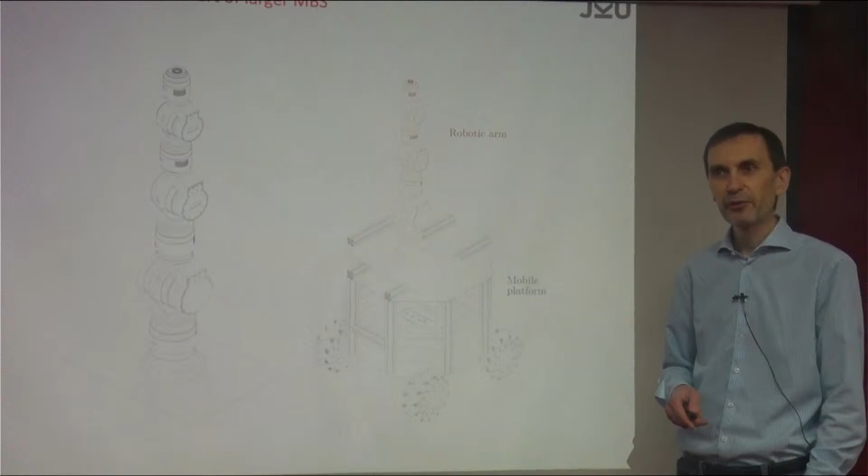Today we're going to extend this approach to floating kinematic chains, also called floating-based systems. This means you have, for example, this robotic arm, but now mounted on a mobile base. Because the mobile base is mobile, not fixed stationarily on the ground, they call it a floating base, because it could be anything.

This can be modeled in different ways. For example, you know these omni wheels, or you might have standard wheels, castor wheels, follower wheels. You might have a UAV, some of you working on UAV, some on underwater things, whatever. This base might exhibit certain motions, might be allowed certain motions.

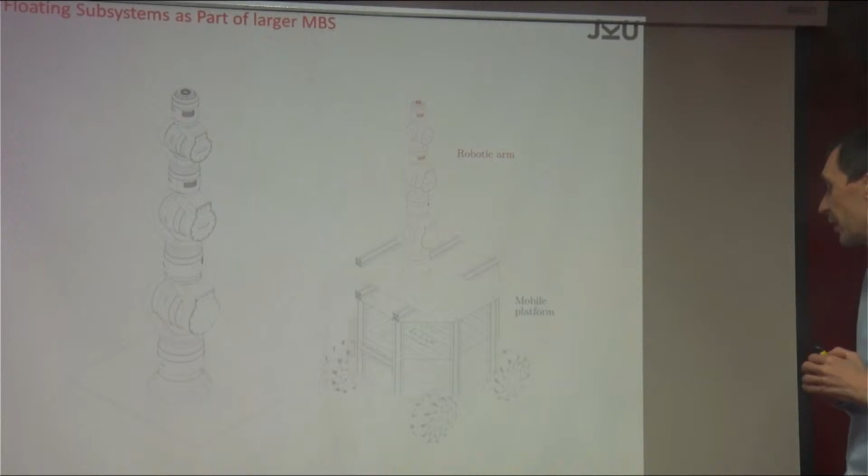So the modeling approach is that you first model it as a free floating system, hence the name free floating system, a floating-based system. Then you introduce the interaction of the base with the environment.

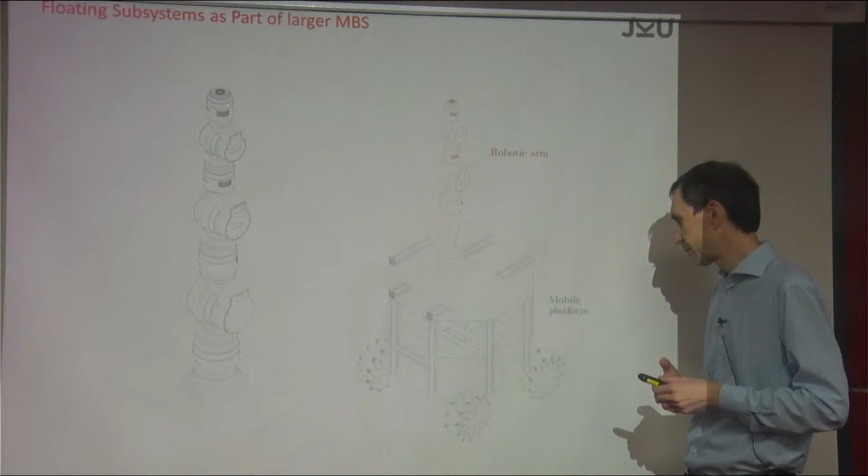That interaction could be due to the rolling condition of standard wheels, mecanum wheels, or omnidirectional wheels, or it might be due to interaction with a fluid, fluid structure interaction. This fluid structure interaction is not easy to do, as some of you have realized, but this is not our topic.

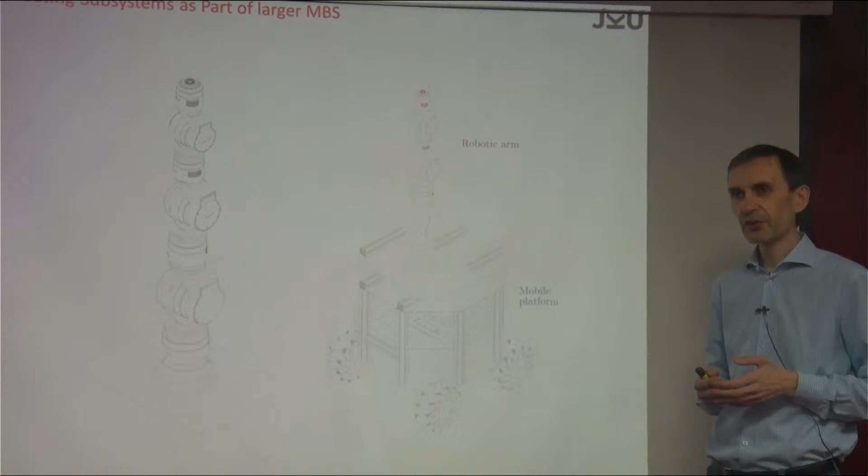Our topic is just to model this floating-based system as a big rigid body, the base, on which is mounted a kinematic chain. I like to repeat this example, the robotic hand, because you can model a robotic hand or any part of a system as a floating-based system: you first model the hand or whatever system you have, and then say this base later on maybe is fixed somewhere.

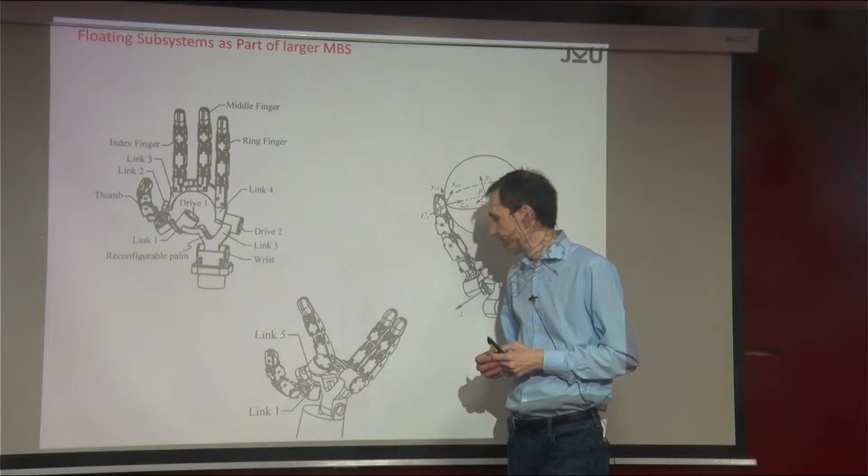Once you have the equations for the system with the base free floating, you can then say the base is moving according to whatever. There's a topic called subsystem modeling, and this is going in that direction, because you can say this is a subsystem of the big system. This is a different topic beyond our lecture, but you may already see that this is possible to do.

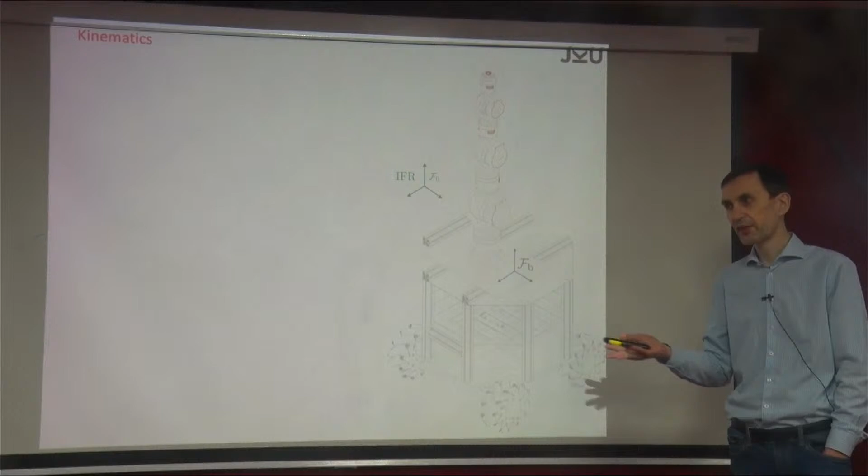So how do we do it? Essentially we can follow up on what we did yesterday. We can use the dynamic motion equations of the kinematic chain, but which is now moving, meaning the base is now moving by some other means. What we did in the past was we said we have one, and that's what we're going to do again.

We have one space-fixed frame, called the inertial frame. The space-fixed frame is still there, but now the robotic arm is not fixed relative to it. But how do we model it? The frame that was originally fixed to the ground is now fixed to the first link, let's call it link 0 of the robotic arm, but it's not stationary relative to the space-fixed frame anymore—it's allowed to move.

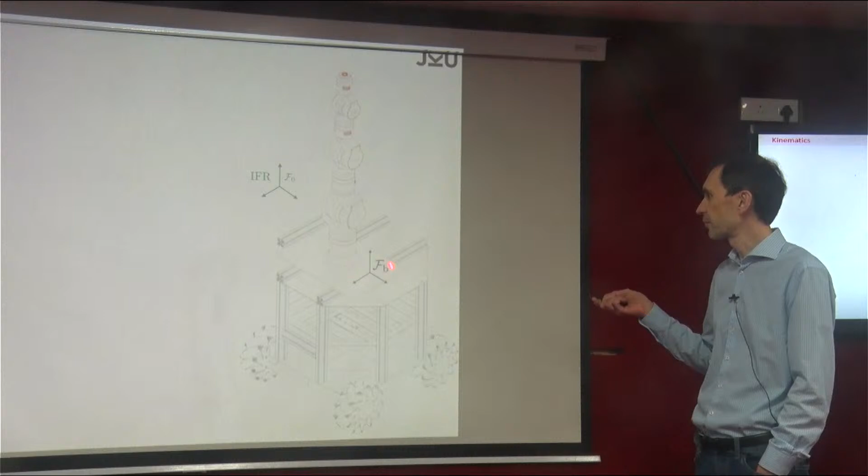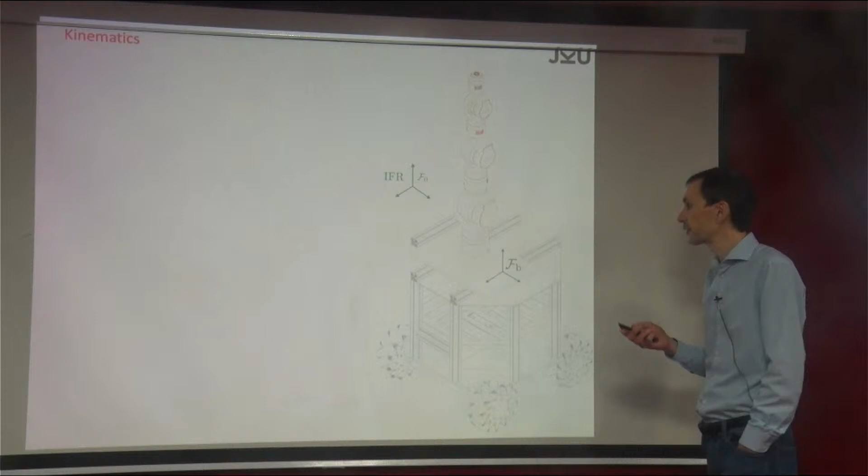So long story short, yesterday what we did, we said this frame is actually the space-fixed frame, the inertial frame. Now we're saying there is a separate frame which we use to describe the motion of the kinematic chain, and this one is allowed to move relative to the space-fixed frame. That's the basic concept. Now we have to look at the kinematics first, then the motion of the kinematic chain, and then the dynamics.

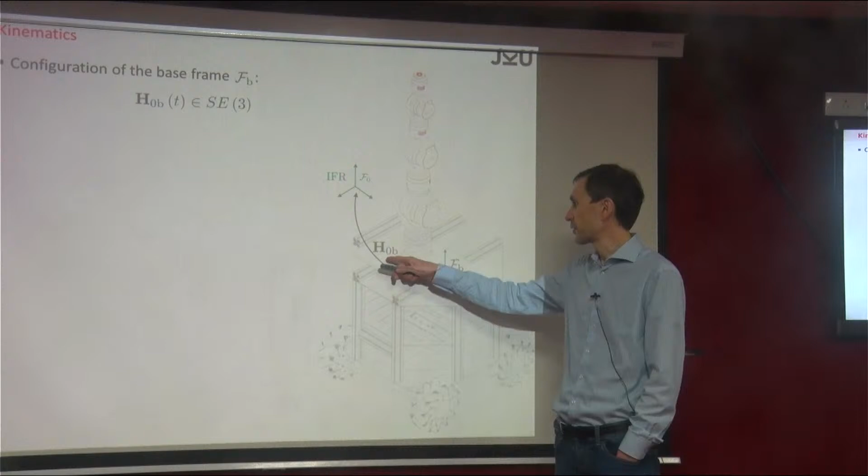We have one more object: the base. It might be a very complicated system, or it might just be a rigid body—let's say the base is represented as a rigid body. So we have the base frame, and the base frame is somehow moving relative to the inertial frame. We use a homogeneous transformation matrix to describe this motion—the pose of the base relative to the inertial frame. This is H0B, and H0B is time dependent. Good, so this is the setting.

What do we do with the end effector motion, or the configuration, the pose of body I in the chain? We still have the same kinematic chain, say 1, 2, 3, 4, in this case 6 bodies. Those bodies are moving relative to the space-fixed frame, but we do this detour via the base, and the base is here, so we have to take into account the base motion.

So again, we use this product of exponentials formula, in the sense that the motion of each body relative to the base frame—which for the stationary system was the inertial frame—relative to the base frame we have again this standard form, the one we already introduced. But this only gives you the motion of body I relative to that frame. What we have to add is the motion of the base frame relative to the inertial frame. The whole thing is moving, and this is encoded into H0B, which is just a function of time.

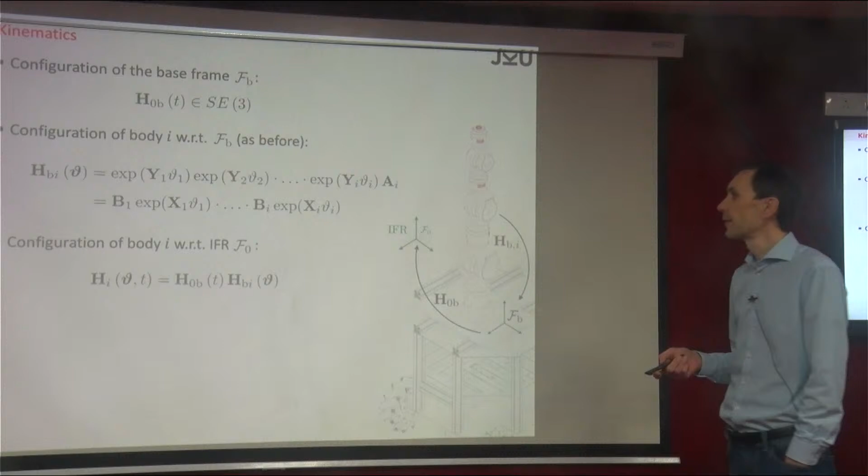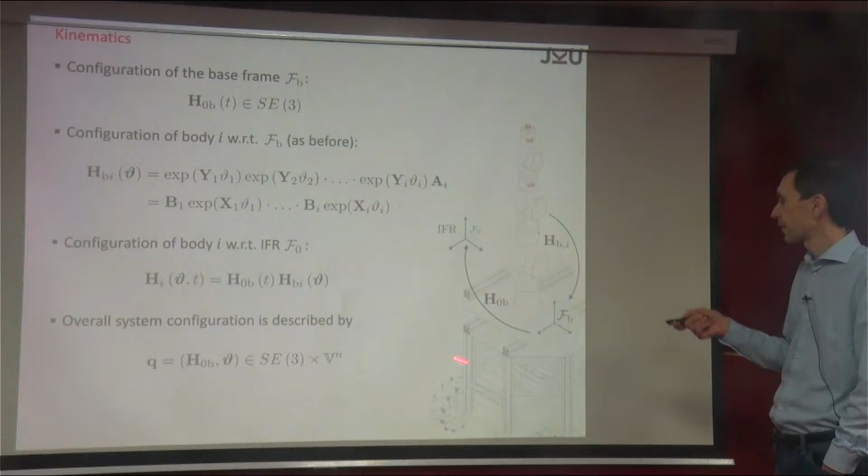So now we have HI, skipping the 0, which gives you the transformation from each of the body frames to the inertial frame, only by using the detour via the base frame. Now the overall system configuration is described by the joint angles, as well as that pose—the homogeneous transformation that transforms the base frame to the inertial frame.

By the way, what we did yesterday when we had these motion equations—just to introduce a term—we had our motion equations in terms of Q, a vector with n components, let's say from Rn for simplicity. This is normally called the generalized coordinates, or the configuration of the system, because once you specify Q, the system's pose, the configuration, is uniquely determined.

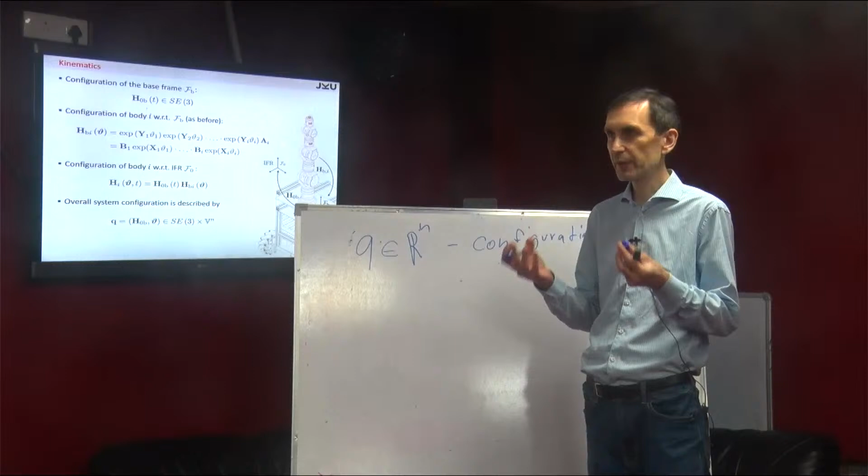Now we do a bit extra, because our Q is now the joint angles vector plus, including this other way around, H0B, and of course theta. So that's again our configuration—this is the configuration of our system. This Rn normally gets its name because it's the configuration space.

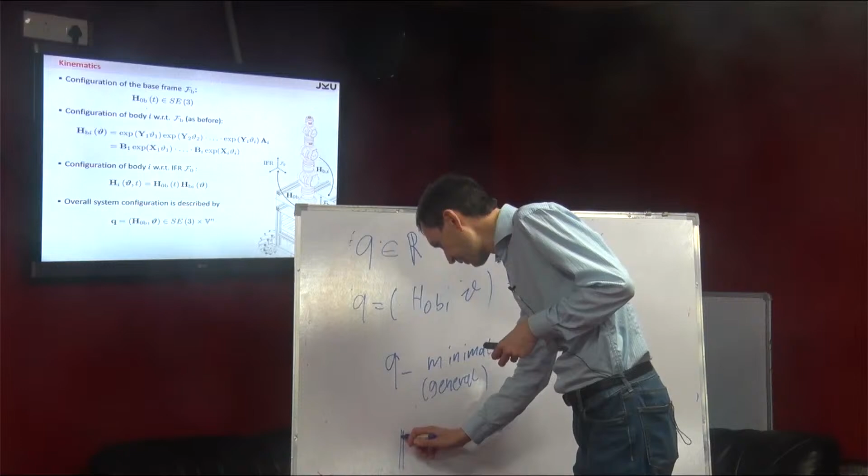These Qs are normally called the minimal coordinates or generalized coordinates. If you look into Lagrangian mechanics, you find this term of generalized coordinates. The Rn in this case is the configuration space, because the vectors Q represent the configuration. Each of the Qs, or theta depending on the system, uniquely specifies the configuration of the system, and all of these Qs together make a space — this is the configuration space. It's an n-dimensional space.

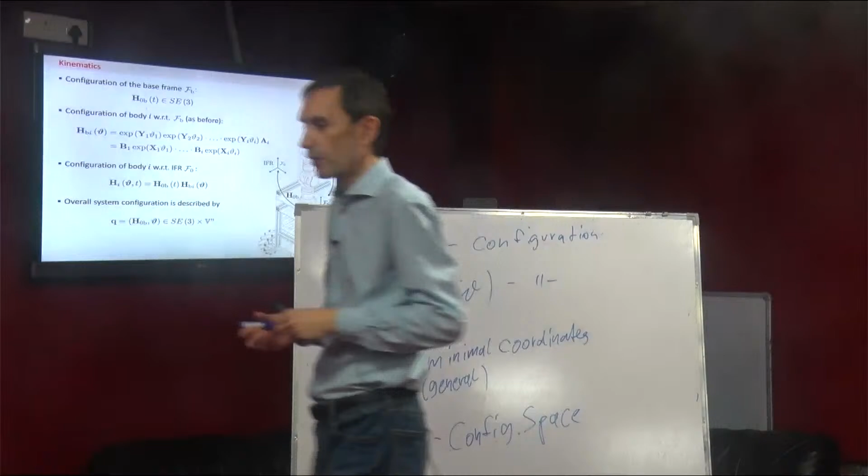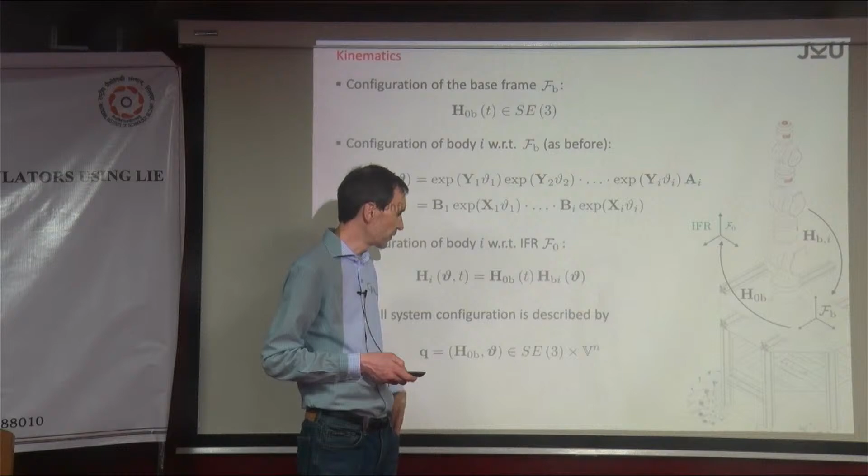Just for completeness, because that's something important we didn't say yesterday. Now we have a different configuration space, because now we have one more element, the homogeneous matrix. We've been saying these homogeneous matrices form a space, and we even said they form what we call a Lie group, which we call SE3. So our configuration is the original one, like theta, the joint angles, which could be Rn, but I use SE3 times Vn.

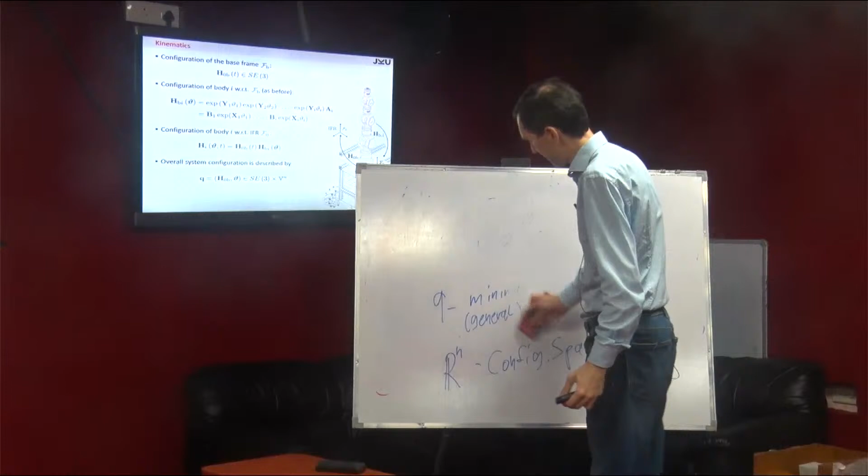Okay, maybe we should — I had one little detail that you might be interested in, which is the question about this configuration space. I was saying it's Rn, right?

So let's say we have these joint angles, and let's call them theta now — theta, Q, it doesn't really make a difference. So we have theta 1 up to theta n. Let's say these are the joint angles, so we have n revolute joints, like in this typical example of a robotic arm. So what's the space that this guy is living in? This is an n-vector. What would you say?

So is it like Rn or something? Is it okay, like this? Yeah, like Rn. Are you sure?

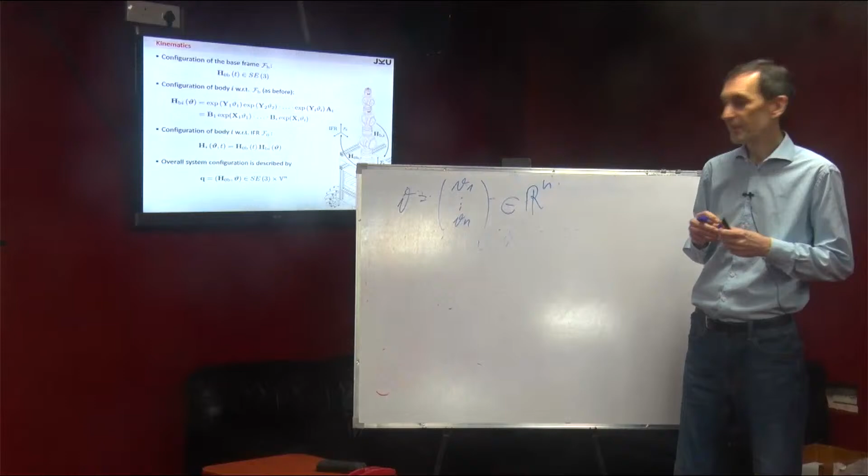The funny thing with these revolute joints is — let's say we look at one joint. Let's say this is 0, like theta 1 or whatever. Now you start turning, rotating, and you reach pi, for example. And you go the other way, maybe you reach minus pi. So what happens if you go further? Then you multiply it — but physically, what does it mean? You're coming back to the same point, right? So it's all modulo 2 pi.

Topologically, what they say is that you have to somehow identify — let's say you're here, at 3/2 pi, which is the same as saying I'm here at minus pi/2. So in this sense, you can actually identify the two ends here, because once you're going this way, you're actually coming this way. So you can close the loop here. This is why topologically, the configuration space of a revolute joint is not Rn, but it's the circle — essentially, it's a circle.

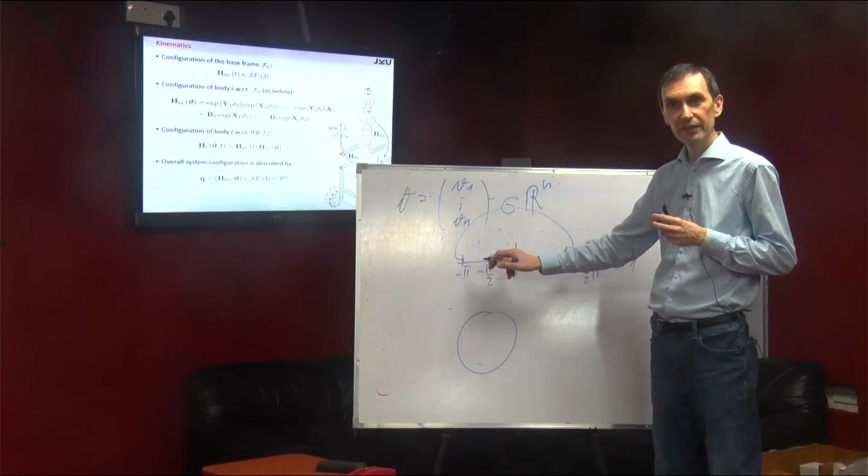It might sound a bit far-fetched and esoteric, but if you do motion planning, for example, that's important. If you have your A-star algorithm, and you don't tell it that being here is the same as being here, it starts searching and going somewhere, but it doesn't realize you're actually at the same point.

So it's important. Now the interesting thing is — let's say this was theta 1, representing the configuration space of the first joint angle. Now let's include two angles, joint 1 and joint 2. So what happens then? For each value of theta 1, you specify the first joint, one value, like here.

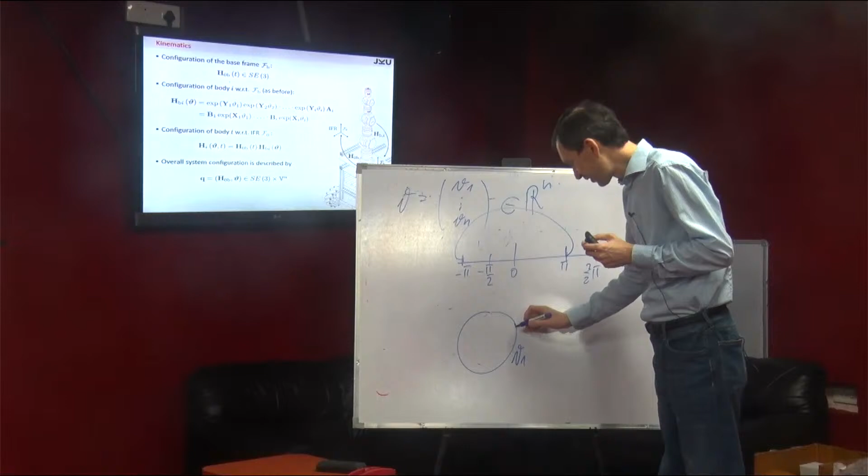So for each of these values, for one particular theta 1, you get again a circle for the second one. So pictorially, you can imagine this is like a circle, and for each of these points, you have this theta 2. Now if you do this for all the theta 1s, what you're getting is a torus, a donut. That's why you should be careful saying Rn, because for all these revolute jointed mechanisms, you usually have a torus. They call it Tn for the n-dimensional torus. A donut is a two-dimensional thing, and I don't know what this three-dimensional donut is, but you can imagine.

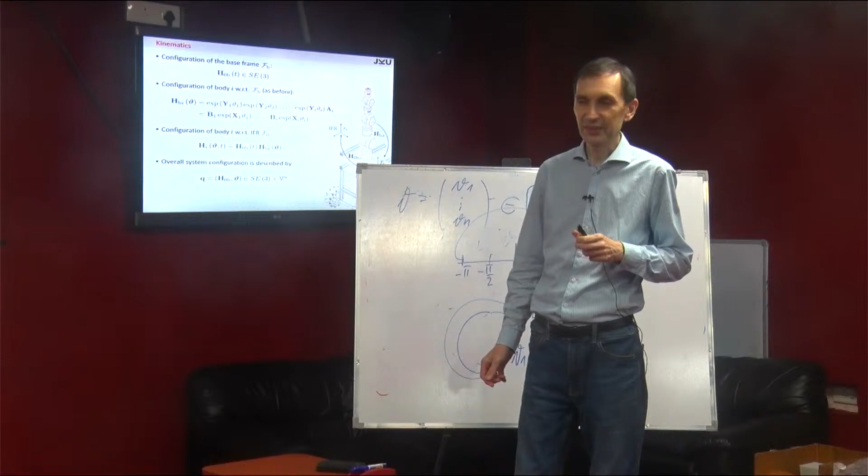Anyway, this might sound a bit far-fetched, but if you do motion planning, it's really important to consider this.

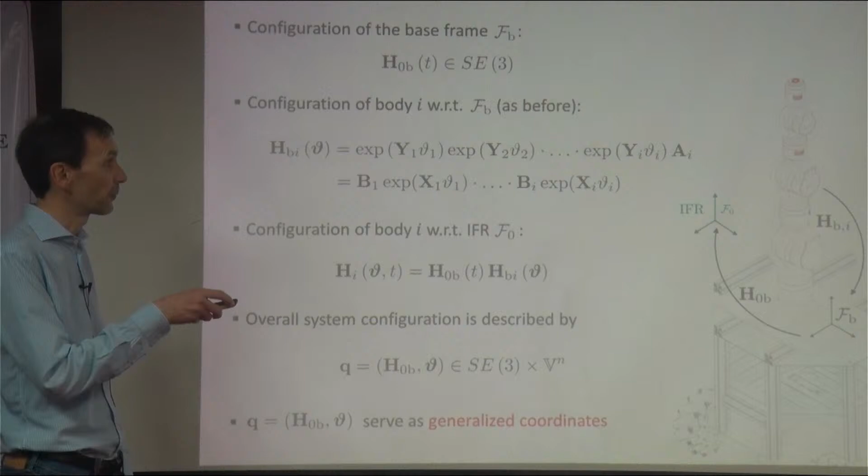Yes, and that of course covers generalized coordinates. So what we have to do is look at twists. That was the position. We know the pose of our bodies in the kinematic chain given the base motion. But we're interested in the body fixed twist and the twist of the complete system. So we should start by saying the base is moving too, so we have a twist. The base has a twist, VB.

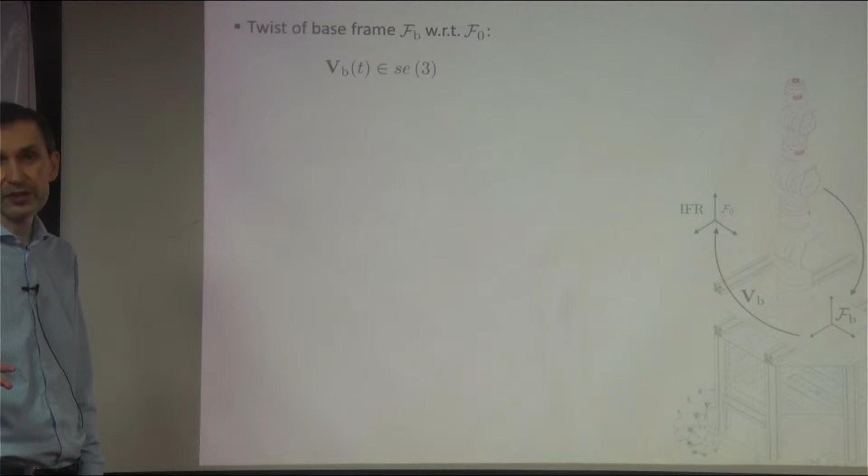So just call it VB. And without mentioning it, we always use the body fixed representation, but in the end it wouldn't make a difference.

Then we have the twist relative to the base body, because the twist of body I, for example, first has to be expressed in the base frame, and we need a notation for this. Let's call it BI. Remember this is like the position vector, it goes from-to. So it's from B to I, or I relative to B, meaning body I and link I in our kinematic chain relative to the base, and the velocity is just this.

And we already know how to compute the velocity. We have the Jacobian that we derived with these instantaneous coordinates, and then it's there. No matter how you derive a Jacobian, it's there, you can do it differently if you like.

So we know the velocity of body I relative to the base frame. And then you know almost the velocity of body I relative to the space fixed frame. If you followed the basic ideas, maybe not necessarily all the mathematics, you should understand what's written here. I keep repeating myself, but it's good to repeat it.

So VI, the twist of body I relative to the space fixed frame, how do you get it? Well, it depends where you start, and I'd like to represent it in the body fixed frame. First, it's the twist of body I relative to the base, plus the twist of the base relative to the space fixed frame. Pretty simple, but you have to be careful because the base twist has to be transformed, expressed in the body I frame, and that goes via this adjoint.

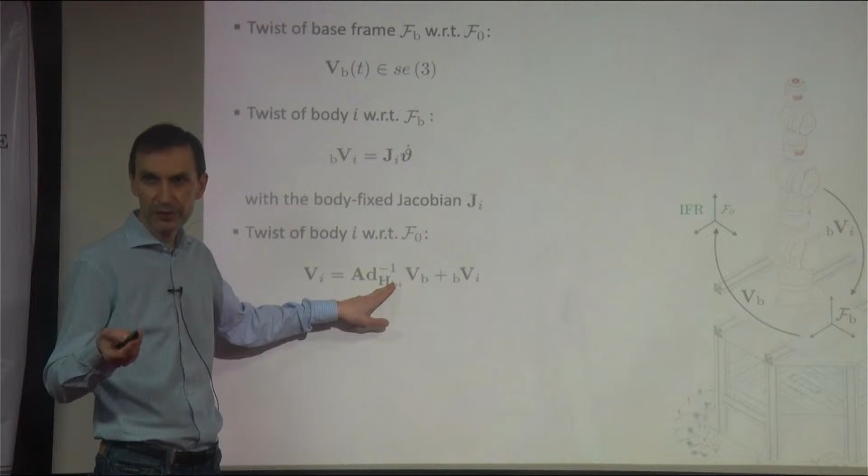And the adjoint gets HBI. What was HBI? It was the pose of body I relative to the base. And remember, this H was the homogeneous matrix transforming from the I frame, body I frame, to the base. So the inverse would do the opposite, transforming from the base to the I frame. And remember, the adjoint is the thing that does the same but for screw coordinates. So twists are transformed by the adjoint of this guy, transforming twists expressed in the base frame to those in the I frame.

So now we are transforming the base twist to the I frame, and that's it. Then you can sum them up, okay? Otherwise you couldn't sum them up. You can just say this plus this.

So I have an expression for the twist of body I, given the base motion twist - the base is moving somehow - and the twist of body I. This is given by the Jacobian, so we can plug this in and get a nice expression. The overall system velocity is then specified by the base motion, the base twist, and the time derivative of the joint coordinates, which is called the generalized coordinates.

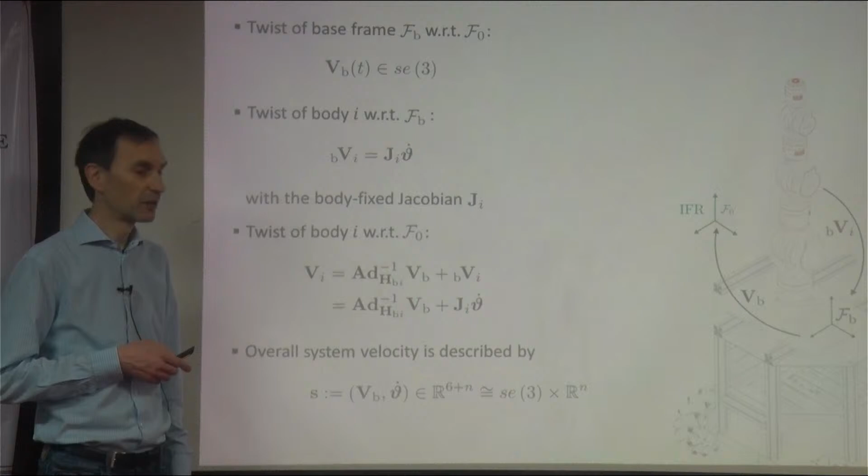So, what's the difference to the stationary kinematic chain? The difference is that now we have 6 more coordinates. In the stationary system, we would have just Rn, just theta dot. Now we have more because we have to account for the base motion.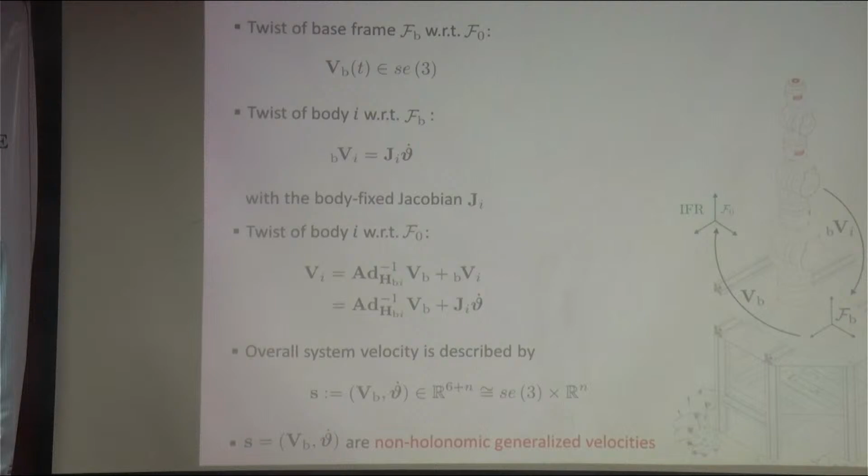There's a bit of a non-holonomic geometry going on. Anyone know about non-holonomic velocities on systems? A little bit, not our topic, but essentially it's about this twist here. We don't have to go into this. Anyway, so we have the velocity, okay, don't need this.

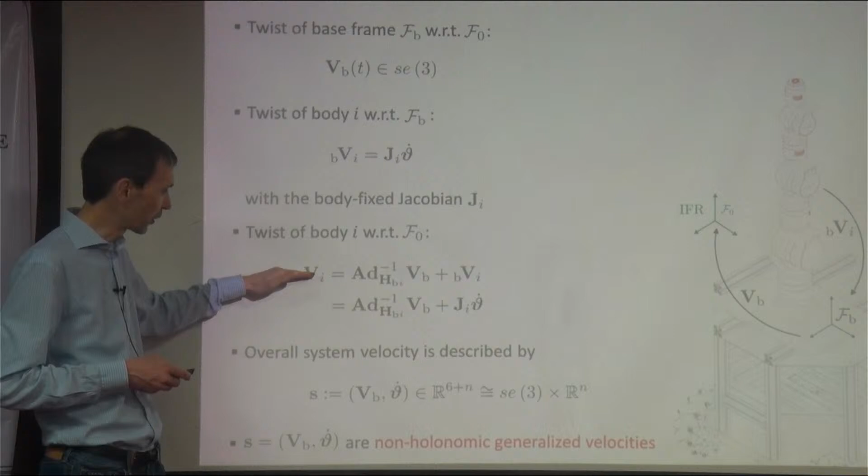So what I said for body I - well, this equation of course has to be written for all the bodies, I mean V1 up to Vn. And then we are here, so V1 up to Vn.

I would like to express all the twists of all the bodies in the system - the base plus the n bodies of the kinematic chain. So the n bodies of the chain and then the base. And this equation here, written for all bodies, we can do like this.

Essentially what I'm saying is we have the Jacobian times theta dot. Remember that we had this system Jacobian, J times Q dot - just look at this one. So J times theta dot gives you the system twist vector, all the 6 vectors of all the bodies, okay? That's essentially what we have here as the first part - this part for all the bodies. That guy times this gives you the first part of this equation.

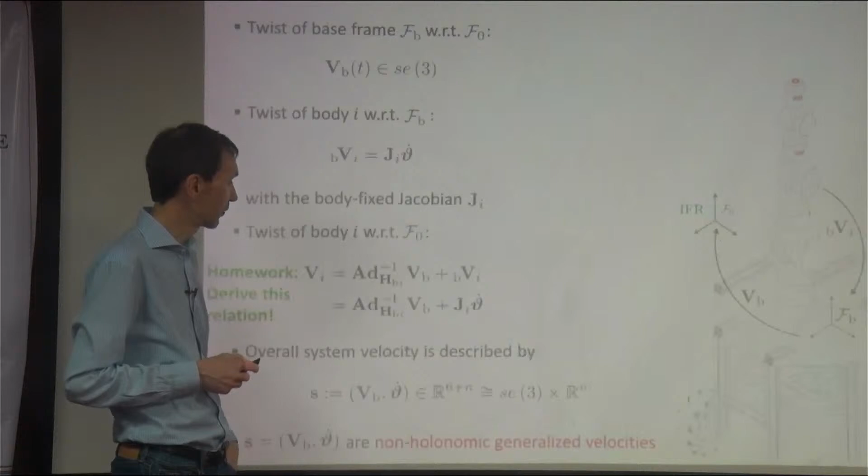And then we have this contribution by the base twist - this one here. So we have the adjoint of the transformation BI: B1, B2, B up to Bn. I kind of collect them in a matrix, I call it U, U bar for some reason. So essentially we have again a kind of Jacobian that you multiply with the generalized speed, because our generalized velocities or generalized speeds are theta dot and vb, and that's the compact form for writing the system twist, now comprising n+1 twists, 6(n+1) components, in terms of the generalized velocities.

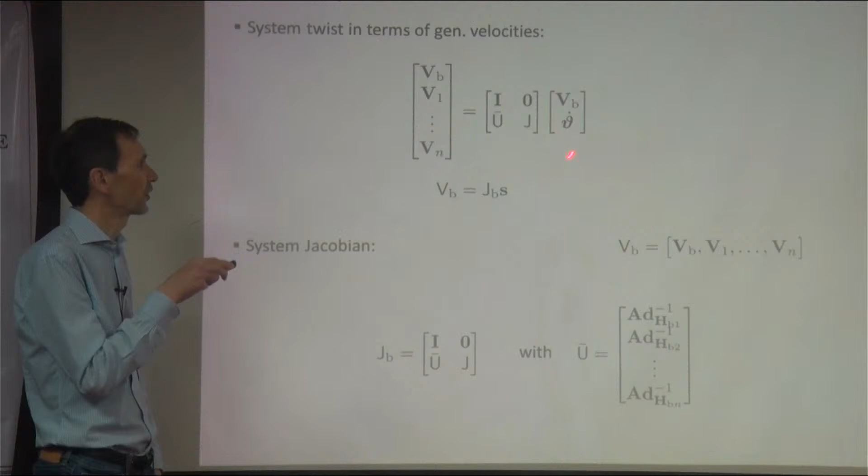Not much more to say. You just have to digest it a bit, and everything is good. More I cannot say.

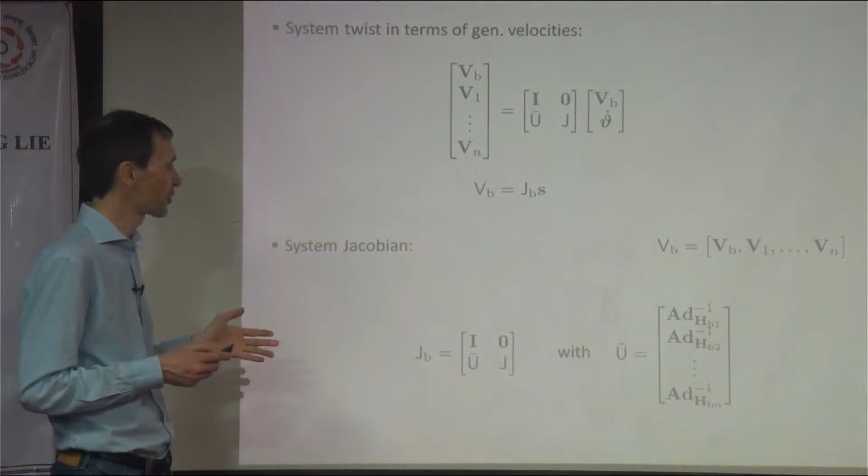And of course, remember that we said we can factorize the Jacobian. I have to stress this: that is the Jacobian that you already have, there's nothing else to do. This is the Jacobian of your stationary system, right? So you don't have to derive a new Jacobian. It's the same Jacobian. And remember that this Jacobian we could split, we could factorize.

We have been saying that for the stationary system, our Jacobian was J equal to A times X. A was this triangular matrix, and X was this constant vector with the screw coordinates in it. And this is very nice, exactly as it says here. We can do the same for this Jacobian - it's JB now, defined in this way. JB is the one that gives you the twist of the floating base system. We can do the same: we have a matrix A and a matrix X, but now they get an index B because they look a bit different.

But it's all the same. So we have again this factorization. Okay, we don't need this too much for us. I just left it in the slides.

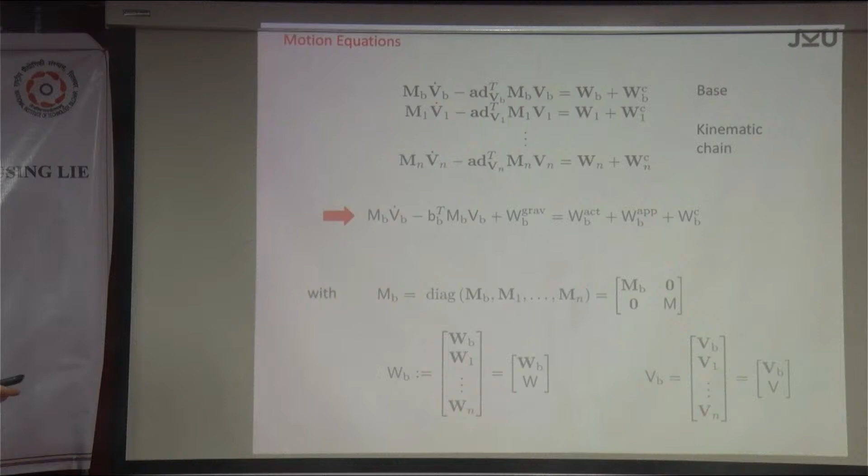Now the motion equation, we get exactly in the same way as we did yesterday. And that's the beauty about this kind of virtual power approach. Because what you do is, again, you just line up all the individual Newton-Euler equations. Remember that these equations are just the compact form, all 6 equations, of the linear momentum and the angular momentum balance, which are the Newton-Euler equations. In the most general form, because we had them in a frame that is not necessarily attached in the center of mass. But you can do this, and then you have your good Newton-Euler equations.

And we do the same. The only difference is now that we have one more, right? So for the stationary case, we just had the bodies 1 up to n. Now we have one more. We have this base motion, right, which is there.

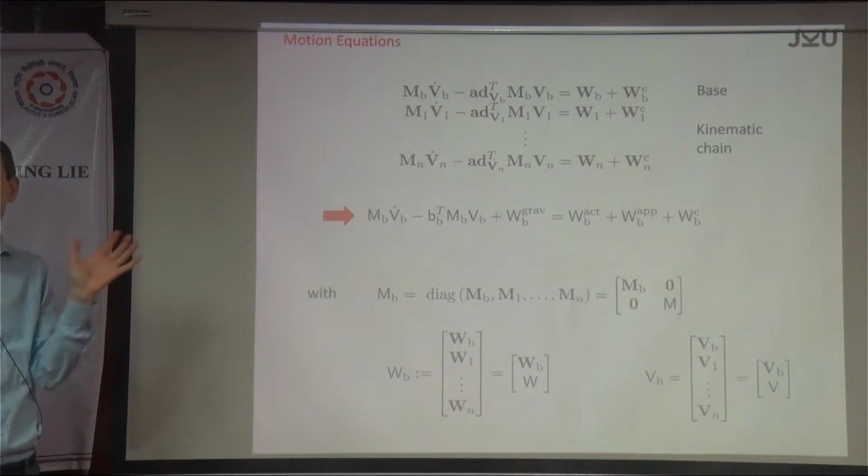And I hope you get a bit of the general idea about this method, because first of all, you consider all these bodies independently. You just say, okay, give me this body, and I write down the Newton-Euler equation. And then I'm imposing the kinematic constraint, so to say. I'm restricting it then.

And if you do all this, first of all, we should write this equation again in the compact form, by saying that I define again this matrix, the big matrix M, by just having the 6 times 6 mass matrices, the constant matrices, on the diagonal. So essentially it's like this.

And then of course, if you multiply this, for example the first term, as we did yesterday for the stationary system, just we have one more matrix now. If you multiply this matrix, which is now a 6(n+1) times 6(n+1) matrix, with the time derivative of the system twist, you get exactly the first part of these equations, right?

And then the same kind of game as we did yesterday. Then you have M, B, V, and pre-multiplied with B transpose, and B was this matrix that has the adjoints on the diagonal, okay? And then you get exactly this.

So essentially what I'm saying is this equation is a compact form of all these n+1 equations. But I'm doing this because then I have a nice starting point for deriving the motion equations, in a sense that, again, from the principal variations, I impose the kinematic constraints. And what we have, of course, here is still the constraint wrenches.

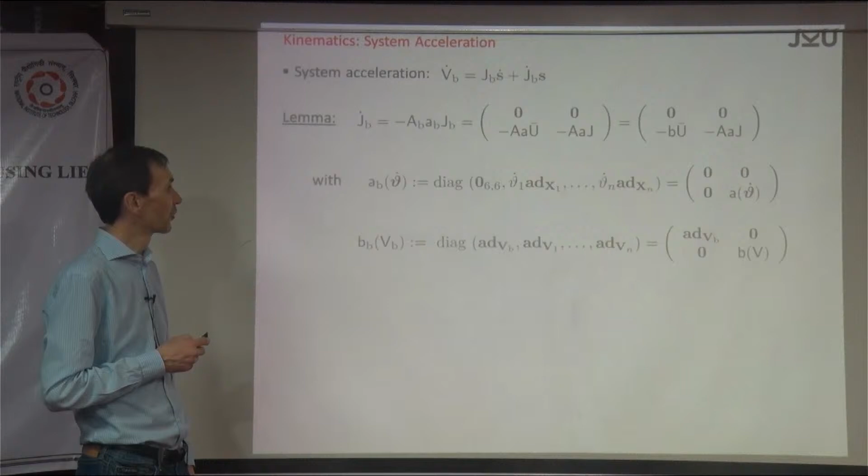If you introduce this one, that one. So we know VB is JB times S, okay? It's always the same. Twist is Jacobian times speed. So you do introduce this here. You introduce this in a sense that you have to, of course, substitute this VB dot and the VB here. Then you get exactly this equation.

So the derivation is exactly as we did it yesterday. Okay, and then you get the mass matrix again. So you get a big mass matrix, of course. This is the first term, J transpose M times J, if you plug in the J times S for V. And then you get exactly the mass matrix. And again, the mass matrix is what we call the generalized mass matrix, right? So it has certain properties.

For example, it's symmetric—hopefully you see that immediately. If you transpose this, you get the same result, simply because the MB is symmetric, and that goes from left to right.

The rest is also the same. This looks exactly like the equations for the stationary system, only now we have a B on the index, which indicates one more component in the Jacobian. And there we go, the gravity goes the same way.

I'll go a bit fast here because it's essentially the same, and you have to look into the slides, otherwise you really need to follow and look into the details—but it's all the same. The gravity, as I was saying, goes the same, and there we go.

This essentially is what we have found for the motion equations—these are the dynamic equations of motion, to be precise, for a floating-base system. So what is the difference?

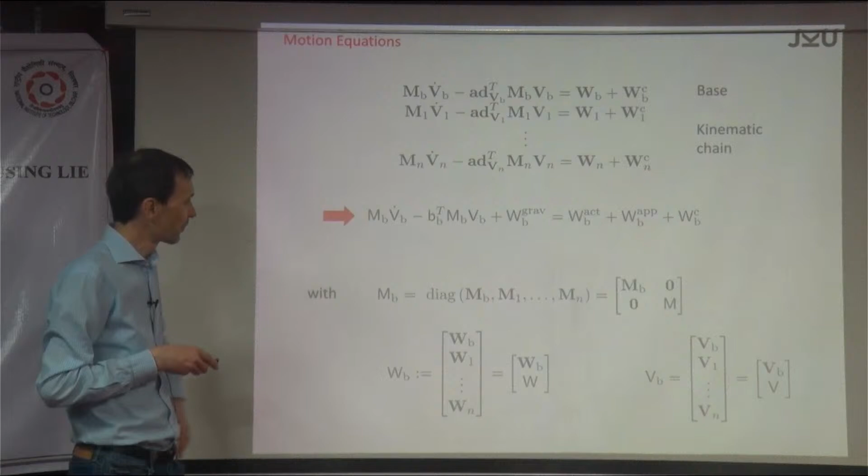Just take this one, go into it and use this MB. So MB is just—if you wouldn't have this MB—that is just the same as we had for the open kinematic chain.

And the Jacobian is almost the same as we had for the open kinematic chain, because it's the Jacobian for the stationary kinematic chain. But now we get one more column here. So now just use it: this transpose times this M, this transpose times this M here, times J.

And what you find is that this M partitions. It makes perfect sense, I hope, right? Because it has to partition—we have first the equation, this part for the base, and then the remaining part for the kinematic chain.

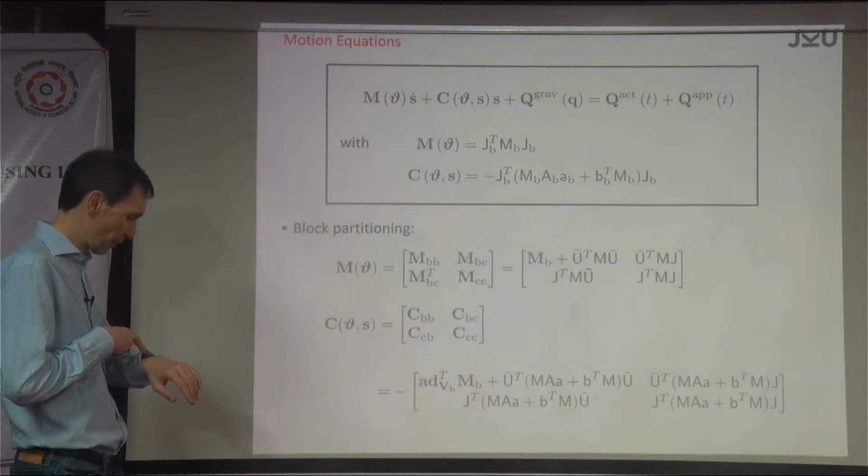The same applies, of course, to the Coriolis term, to this C matrix. If you're really interested, you can compute the C, and then you see what it is.

The thing is that everything is actually easy to implement, because you just have to build this M matrix and the U matrix, and that's it—then you multiply it. There's no rocket science behind it.

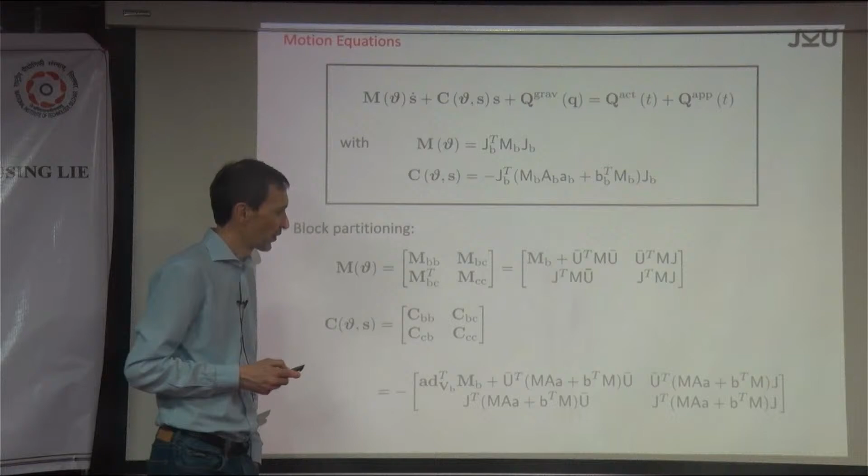There's a name for everything here, of course. That comes more from geometric mechanics, actually, respectively from space systems. Yes, that's right.

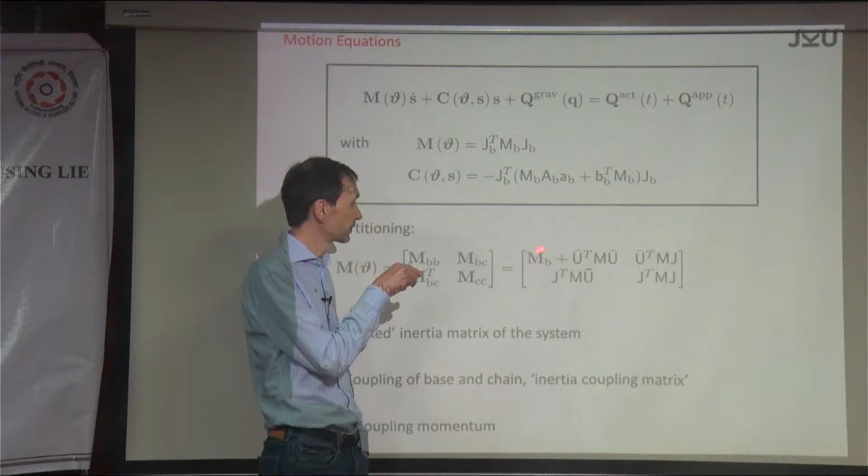How do I get you to this point? It might be interesting to try to understand what we have here. So the first, this MBB—or maybe we should again look at what we get actually. What do we get if you multiply this matrix with S?

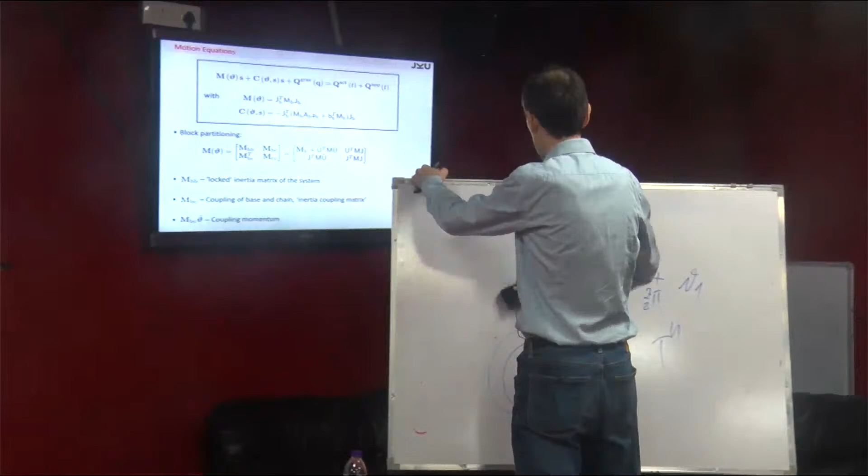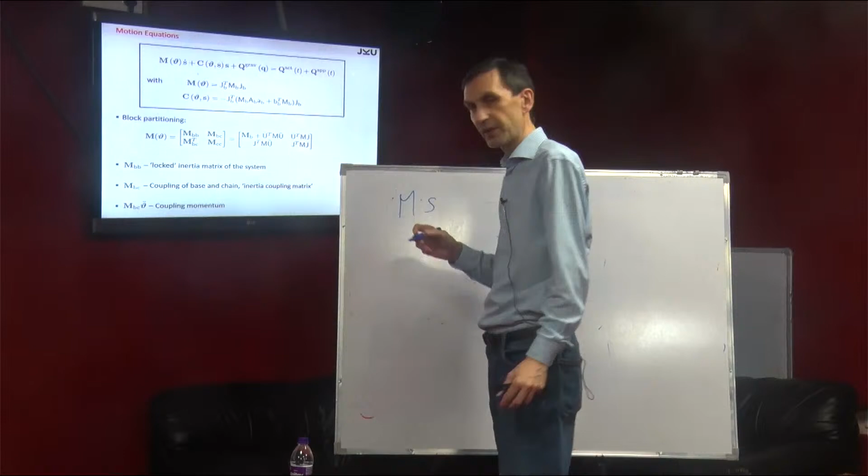What do you get when you multiply this M with S? So again, S is now the speed, right? This is the generalized velocity of our system. As always, when you multiply this M with S, and S is our speed, velocity—it's always the same concept. What do you get? A momentum, correct. So you get a momentum.

Let's call this again P—maybe P_B, because we have a floating base system. I'll just forget about that for now. Okay, so it's a momentum, correct.

Now let's be a bit more precise, because you know exactly how M looks like, right? So it's MBB, times MBC, times MBC transposed, MCC. Okay.

I didn't actually say why I call it B and C. So the B stands for the base—this is somehow related to the base. And the C is for the kinematic chain, C for chain. Now if you multiply this with what?

With the base twist and our joint velocities, joint speeds—then what do we get? We get MBB, for the first part, times VB, plus MBC times theta dot, I guess, right? And then for this part, we get MCC theta dot plus MBC transposed VB. So that's what you get as a momentum here.

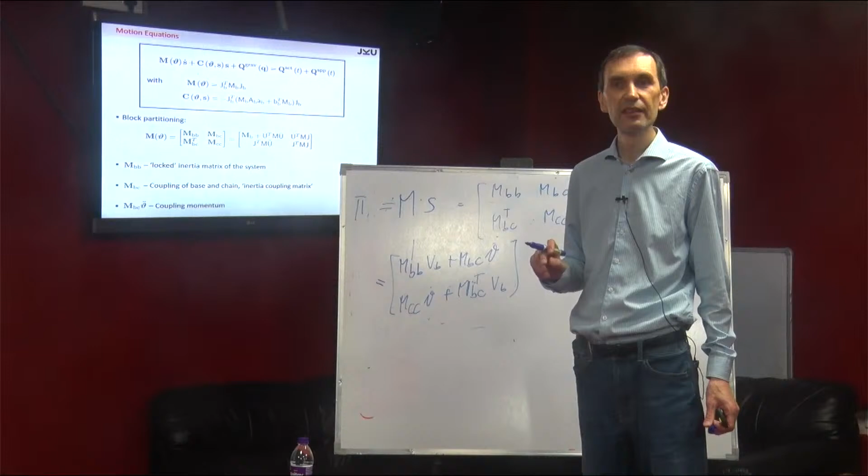6. Exactly, it's 6, because essentially it's this. I mean, if the kinematic chain wouldn't be here, that's just MB, right? It's just the mass matrix of the base. So, but now the base, so yeah, exactly.

Let's assume that the chain, the robot that is mounted on the base, is not moving. So it's locked, say we lock the joints. Then this is 0, right? So essentially the momentum that you have at the base is, as always, MBB times VB. But the thing is, it's not.

An important point now: let's say we have the locked joints, meaning theta dot is 0. Then the first part of the momentum is MBB times VB.

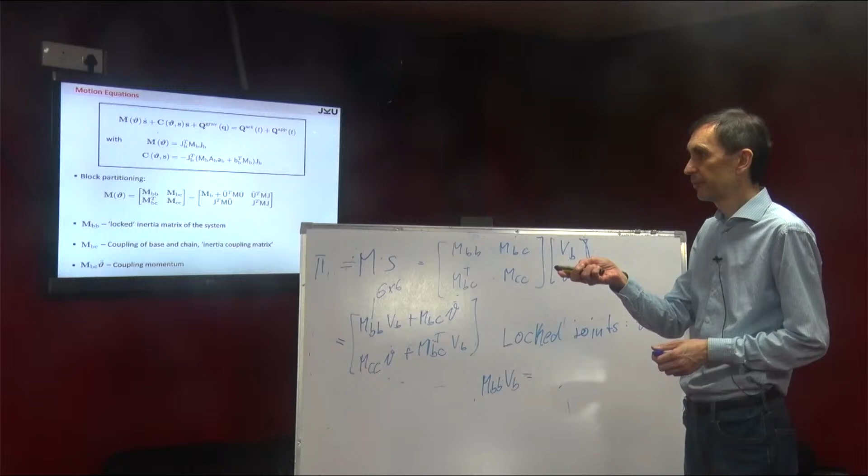But MBB is not just the mass matrix of the base. What is it then? It's this guy here: MB plus U transpose MU. So this is the difference, it is MB plus U transposed MU.

Maybe it's good to understand what that means. Again, if the kinematic chain wouldn't be there, it's just MB, right? So it's just a momentum because of the inertia of the base itself. But now the base carries this kinematic chain, and somehow this must affect the inertia of the system. And that goes via this matrix here.

Maybe we should look into this U matrix again. U is maybe here, so this one. So what does U do? Maybe look at what happens if you, because what we do here is we multiply - oh yeah, I forgot VB, of course. Because what we do, we multiply U with VB first, with the base twist, right?

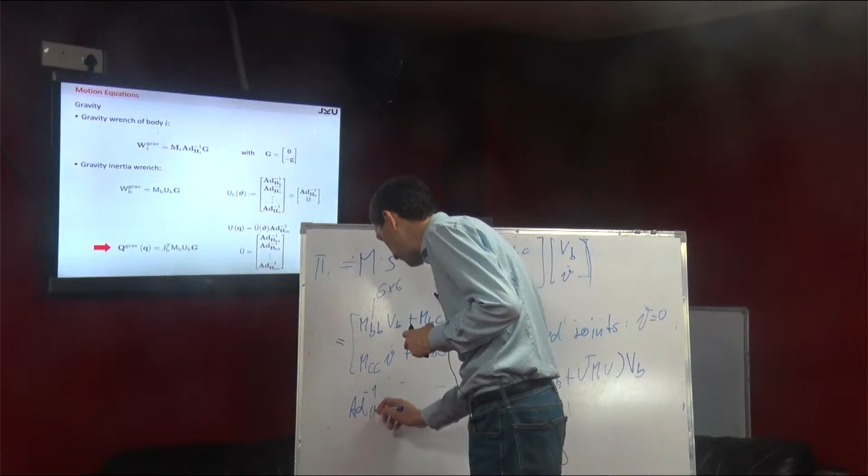So what happens if you multiply U with the base twist? Oh goodness, so we have the adjoint inverse of HB1 times VB. I'm just looking at this term, U times VB. And for the first component, which is this one, right, the first component of U, you get this guy. What is it?

It's the base twist, correct? What does HB1 do? HB1 itself transforms from 1 to B, from link 1 to the base. So the inverse does from the base to link 1. So now essentially what comes out here is the base twist transformed to link 1.

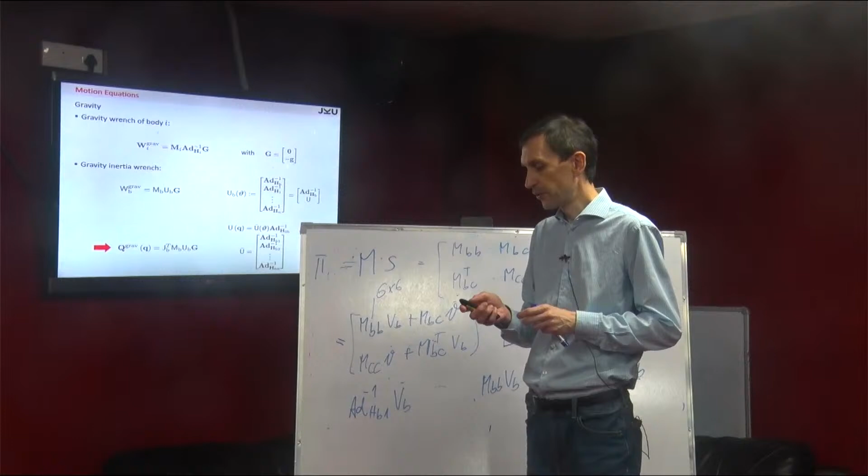Link 1 is just the first in our kinematic chain. So we have this robot here, we have the first link, the second link, and so on. So we have link 1 up to n.

So this is it, and now maybe it's good to have this picture, because what we do now with this equation is we transform the base twist into the link - we started with 1, right? Into the first link 1. I don't know where 1 is, somewhere. So essentially, what does it mean?

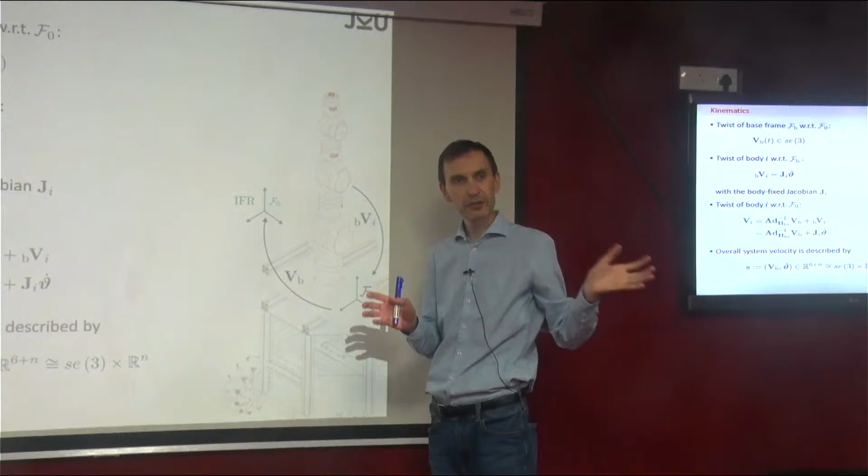It's like saying, okay, the whole kinematic chain as a rigid body, that's why we locked it, is moving. And you're measuring, because it's one big rigid body, we are measuring the velocity. So the whole thing is moving with a certain velocity, and we measure the velocity at the base frame, so the base velocity relative to the inertial frame is VB.

And now I'm measuring this velocity at link number 1. So I know that frame number 1 is now moving with a certain velocity because of the base motion, okay? Not because of the joint motion, just because of the base motion.

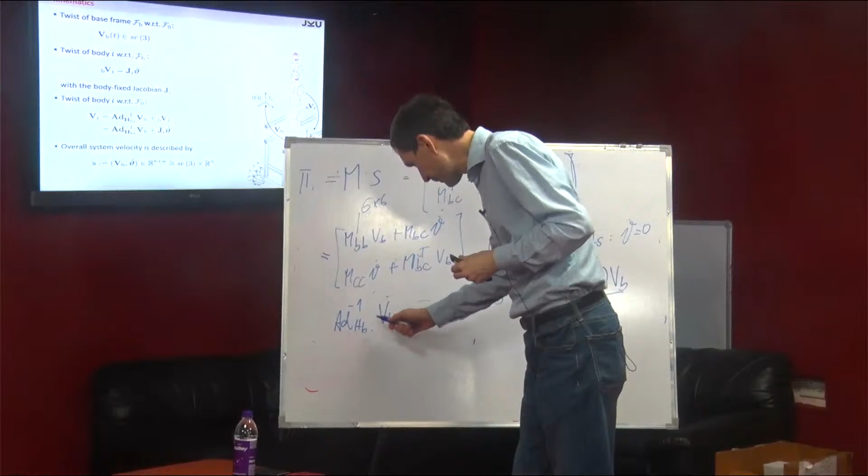And of course I did this now for 1, so this could be I if you want to. We can use it maybe if you like, you can write I in here. So you have HBI. Now we multiply it with M - now it's, I know, it's a bit too many M's here, right?

M, and M is this one. This guy is M, this one. So I look at this M, so it's M1. So we multiply this with M1.

Now I said I. What do you want, I or 1? Is I? I is good, good. So we multiply this with MI. So what do you get?

You get again the momentum of body I due to the motion of the base, right? So this momentum is then multiplied with the transpose of that adjoint matrix. And it always, like I said this at the first day, because transpose inverse, because when you have a transformation and you take the transpose of it, it's always transforming wrenches or momenta, right?

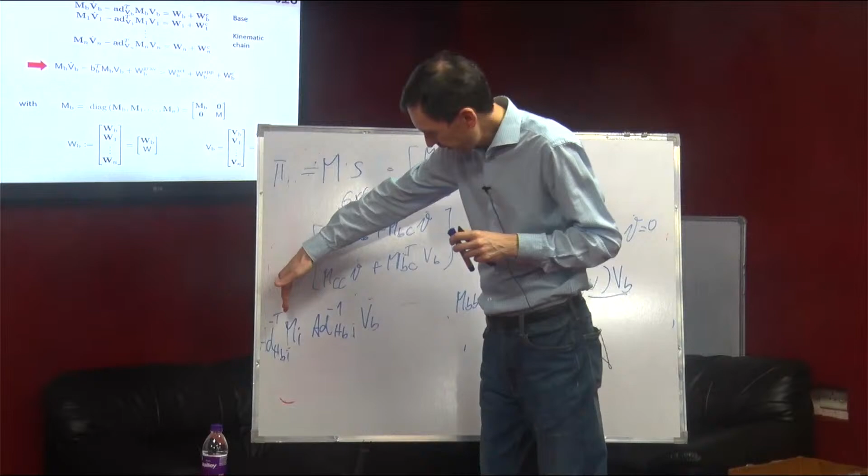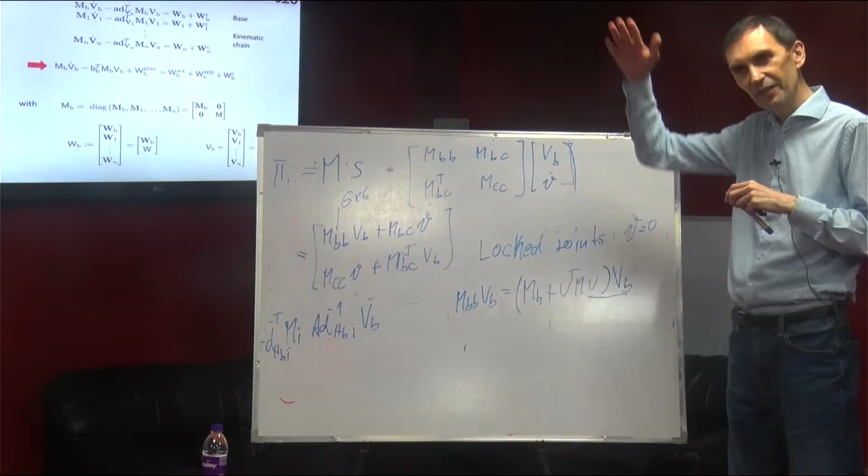So essentially what it does, it takes the momentum that we just computed, which is the momentum of body I due to the motion of the base, and transforms it back to the base frame. So what you get here is actually the momentum measured at the base due to the motion of the base and due to the inertia of all the bodies, which is just a different way of saying,

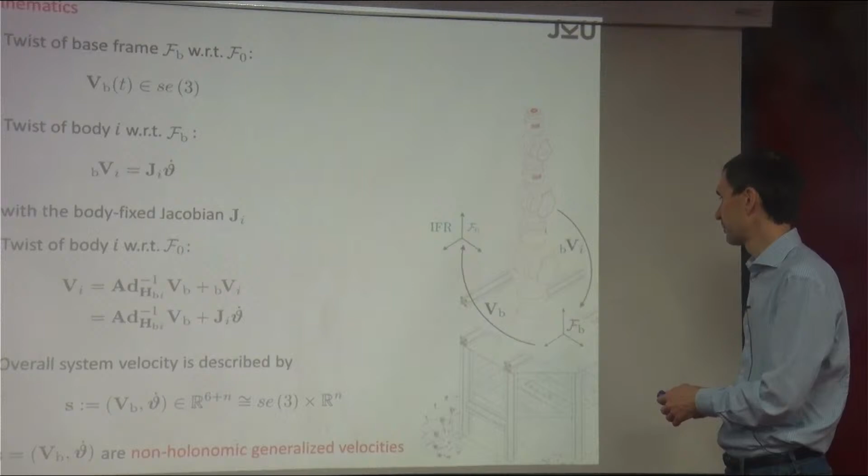I have actually a big kinematic chain. I mean, all this thing is a big rigid body, and I'm accounting for the inertia of, maybe this way, and I'm accounting for the inertia of all these links, right? Because this is what I do, transforming the velocity to the link, take the momentum here, transform it back, and I do this for all these links.

So I have the total momentum of this system as a rigid system when I lock the joints, right? Due to the base motion. And this is why they call this MBB. Now come back to the notation. That's why they call this the locked inertia matrix of the system.

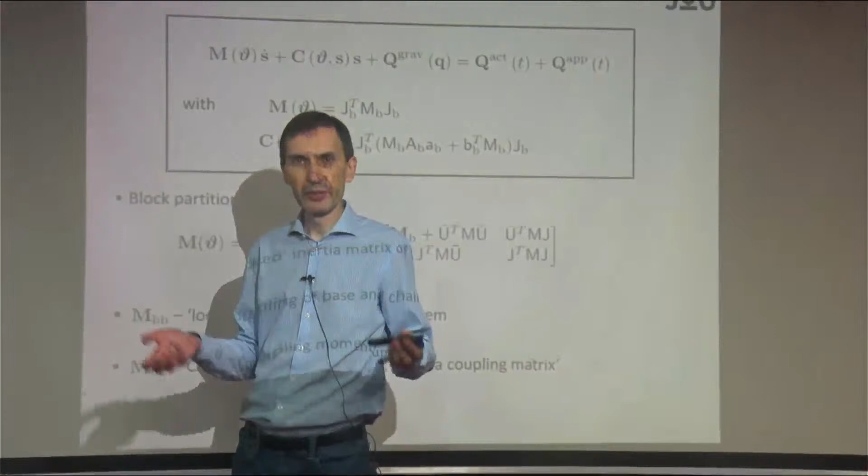And it's an important object. So let's say you have humanoids, I mean floating-base systems, right? So you are interested in what is the kind of inertia that the whole system is just having if you're kind of moving the base, if you are actuating the base, for example, right? And not actuating the joints. The joints are locked. But what is then the inertia that you're kind of measuring at the base at the current configuration of your system?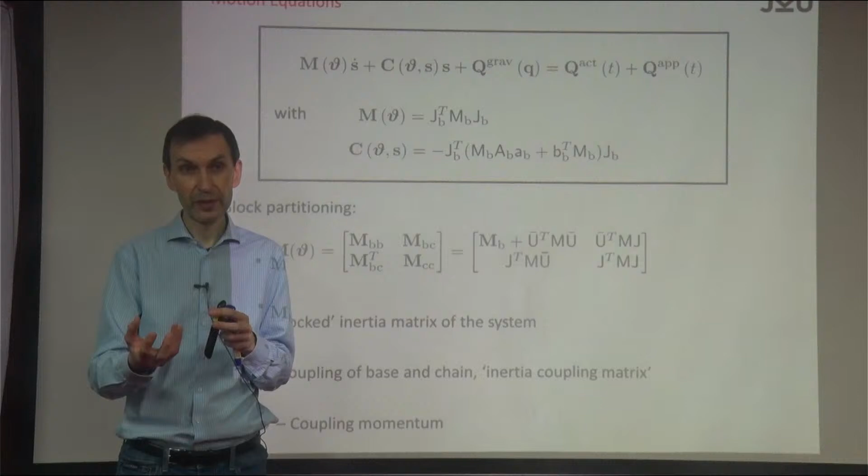When I'm saying current configuration of your system, I'm not sure if I have a picture here. No. Okay, the picture goes here, because of course, the momentum that you get, so to say, this locked inertia, or let's say the inertia properties that you're measuring at, if you can, I mean, kind of virtually consider you grasp the system, you kind of take the base frame and you would like to move it around. What kind of inertia do you feel? And of course, this inertia depends on the configuration of the arm, right?

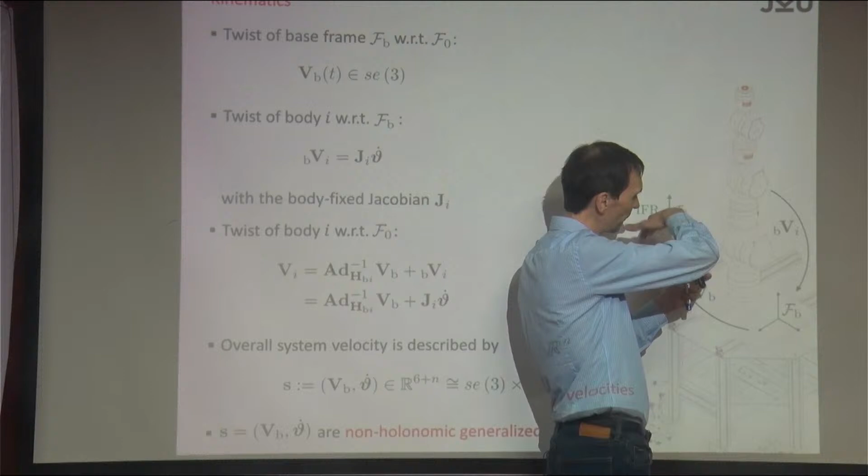And that's why it's important, because it tells you that at a certain configuration of the arm, you have such and such an inertia. And you can imagine that, of course, if the arm, for example, is folded, then the inertia becomes a bit smaller and so on, because it's not just a big thing, it's just a small one. And that's important for many applications. And there's also, when you are in humanoid motion planning and so on, has to do with this,

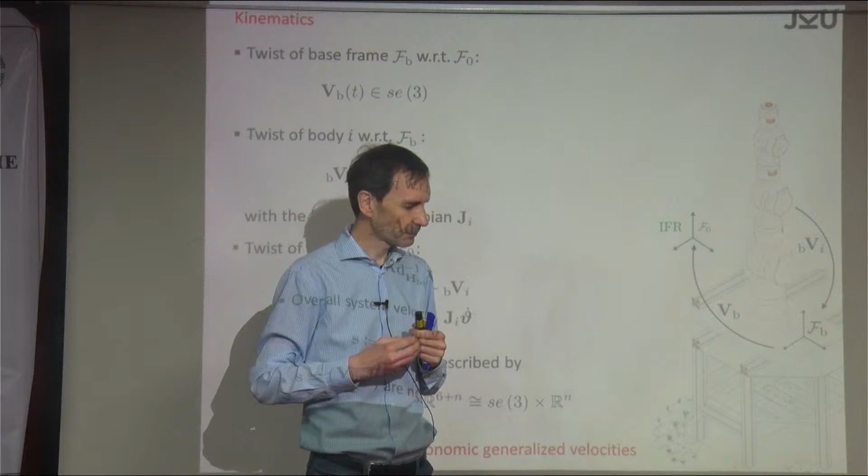What's the name? Inertia ellipse. Oh, no, I forgot it. Who's in humanoids? The term is... I think about it, I should remember.

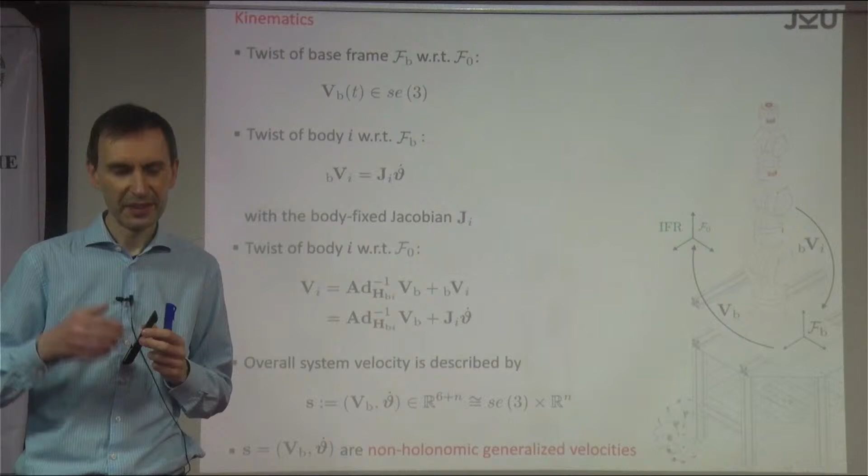Anyway, you can imagine that this is, of course, important, right? Because when you have your humanoid walking robot, then you are interested in the inertia relative to the hip or so, right, or to the foot or so. No, this is a model actually that you mentioned. Anyway, yeah, it's not important. Anyway, so it's obvious, I guess, that this is important.

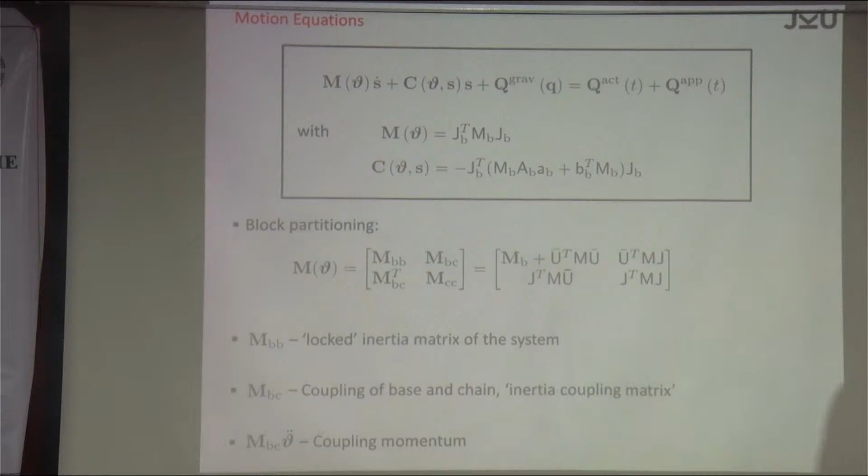Yeah, okay, and this is that. So this was the term, or let's say terminology, that we use. And now we have this other thing that more comes from space systems. Because what about this part here?

Now, what you can say now, for example, I mean, you can always look at extremes, right? One extreme is that now the base is not moving, right? So let's say the base is fixed. So then VB is 0, and the momentum that you measure at the base, right, is only due to the motion of the kinematic chain, theta dot. And that's exactly this. So theta dot is multiplied with MBC, and MBC is this part here.

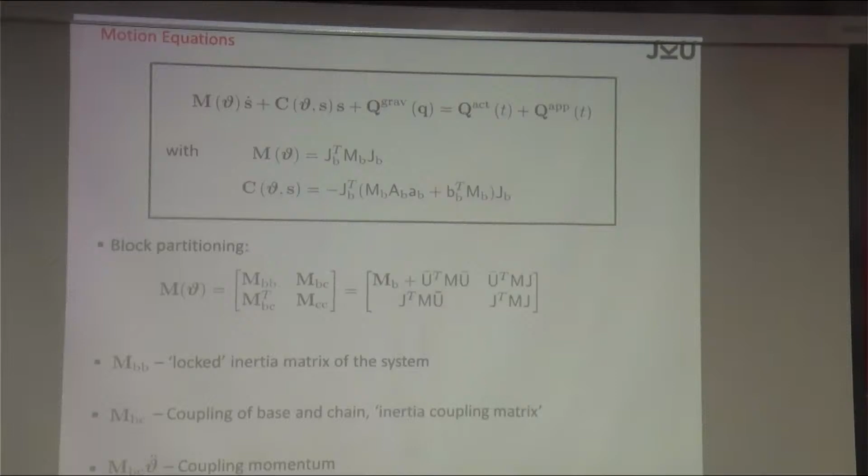And we could try to understand it in the same way, because what does... maybe we should write it out. So MBC, now it's getting full here. MBC theta dot, and MBC is that one. It's U transpose M, J times theta dot.

Now it should be clear, because J times theta dot exactly is the system twist. U transposed MV, right? And now it's the same, but remember, it's the system twist. So again you have this M1, because here we have the inertia of the first body, second, and so on. All the bodies in the kinematic chain, multiplied with their twist. And now the twist is due to the motion of the kinematic chain, because we move the joints.

And then the argument here is the same. You transform and then you get a momentum, of course, because you multiply M1 with V1, M2 with V2, which is in a system twist. And then you transform whatever you get, you transform it back. The same argument here with this U transpose, because U transpose gives you this part, back to the base. So essentially what you get is the momentum at the base due to the motion of the kinematic chain. Why could this be? Oh, yeah.

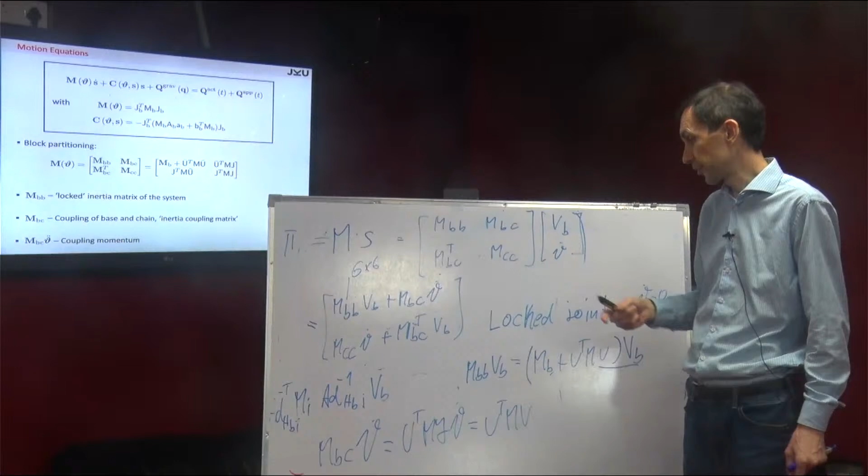So first of all, that's it, and that's what I call the inertia coupling matrix. But why could this be interesting? I mean, let alone floating-base systems, why could this be interesting for someone that works in industrial robotics?

Again, what you're getting is the momentum at the base, which has to do with the wrench at the base, the force and the torques, due to the motion of the kinematic chain. So essentially what you're getting here is the effect, let's say the load at the base, on the foundation. So you have your robot, you mount it somewhere, and you're certainly interested in what force and torque do I actually need to hold the system when I perform certain velocities and accelerations. And that's what you're getting out of this.

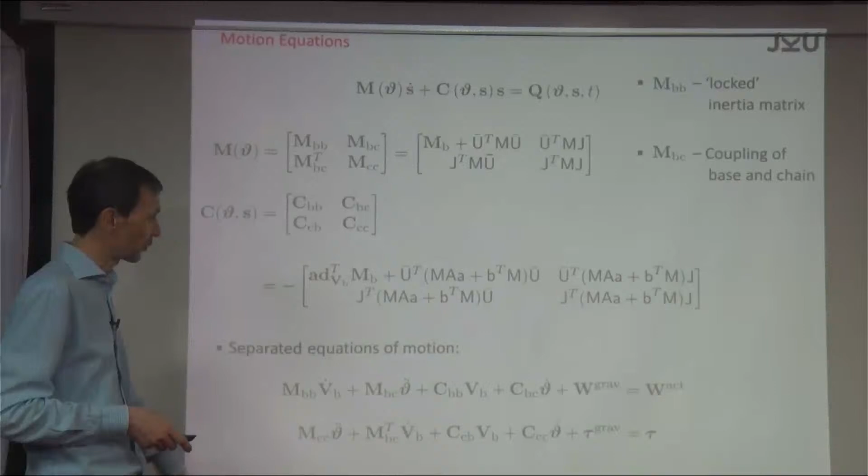Yeah, okay, what else did I try to do? In the end, you can write them explicitly, because you can multiply this all with this S and V and so on. And in the end, what you're getting is a system of two coupled equations. The first one has to do with the base, and the second one with the kinematic chain. And here you get exact, yeah?

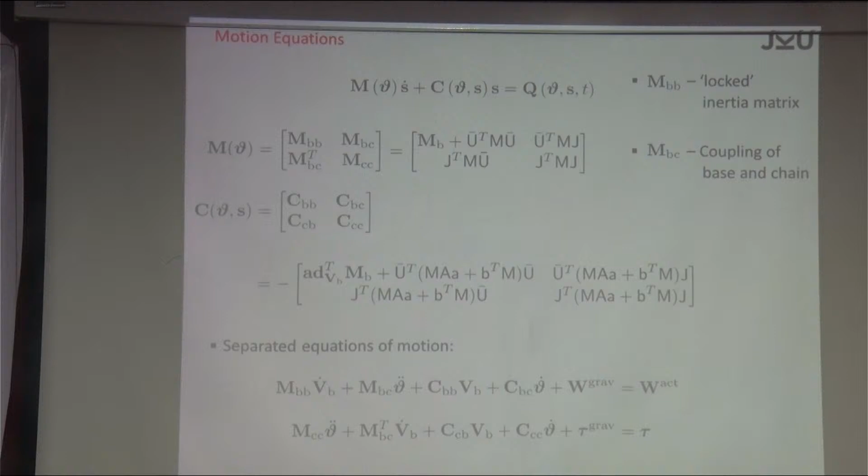So the question was, how do I compute this matrix? It's very simple, you just evaluate this. I mean, these are the symbolic expressions, and you just plug in numbers if you want to have it numerically. So all I'm showing hopefully makes sense for implementations.

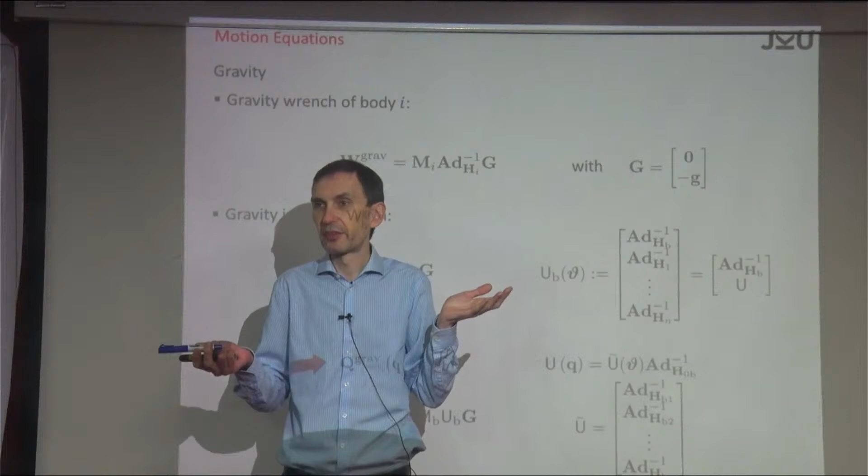Because all this stuff is easy to implement. I know it's a lot to take in for one week. What is it then? Homogeneous matrices, right? So this is this, the adjoint is just a 6x6 matrix that you construct from the homogeneous matrix. So this is a 6x6 matrix that you can compute, and so on and so on. The matrices you have to find, because this is what you get from your inertia properties of the bodies, and then you have it all.

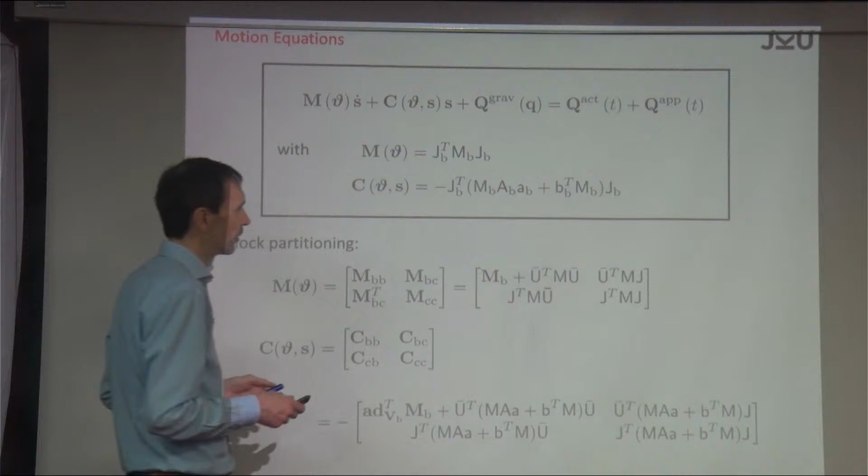And then eventually, this is a good point actually. You can do this symbolically, which is a good idea, because then you have a symbolic analytic expression and you can plug in numbers whenever you like. But you can also say that you're always working with numbers, in the sense that you always have the specific, concrete, particular matrices when you have a certain pose. What I'm saying is, you have 6x6 matrices just with numerical values. That's also what you can do. It depends what you want, or what's more efficient, and usually it's more efficient to have this analytically.